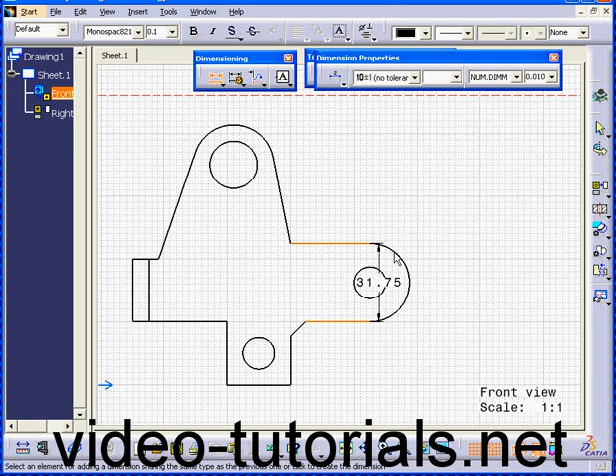I'm going to select the Dimension command from the Dimensioning toolbar. The same command is available under Insert, Dimensioning, Dimensions. I'm going to select one line and a second line. Click mouse button 1 and you have your dimensions.

After we've created our dimension, we can still adjust the position. Let's try this again. Click Dimension. CATIA prompts us in the information corner to select the first element for dimensioning.

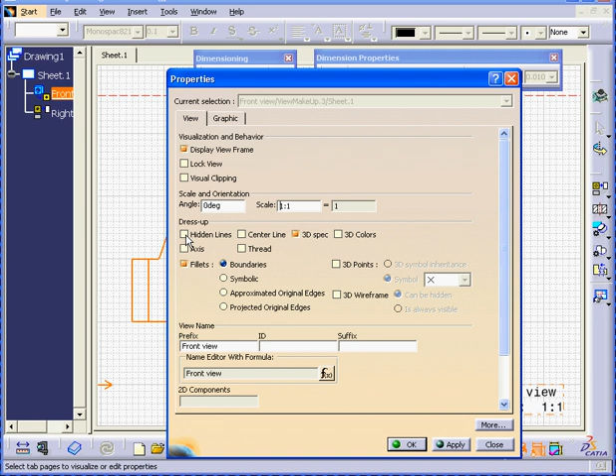I'll select this edge and create another dimension. Let's now right-click on Front View, Properties. Choose Hidden Lines and Center Lines. Click Apply and OK. Now we have center lines and hidden lines, which appear here and here.

This hole is not visible on the front view, but we do see hidden lines right here.

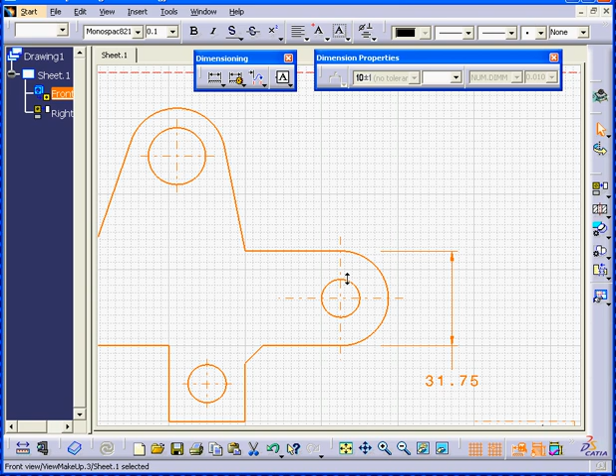Actually, let's create one more dimension. Select this line and this line. CATIA creates an angle dimension.

Let's select dimension again, and we're going to select the edge of this hole. CATIA now creates for us a diameter dimension.

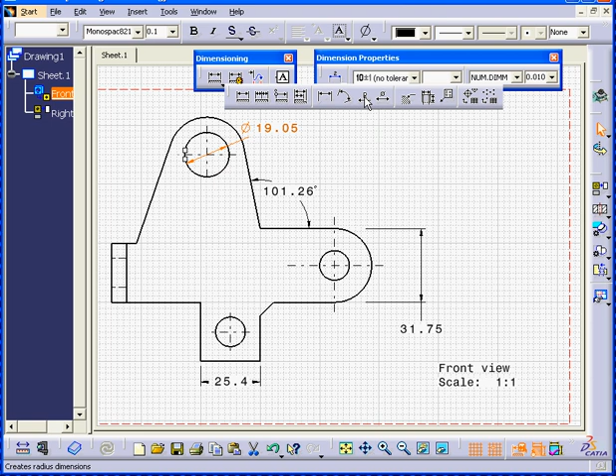If we want to create a radius dimension, we expand this toolbar and choose Radius. Now we have a radius dimension.

Or, go back to Dimensions and click on the edge of this hole. Right-click and choose the dimension you need. In this case, you can choose between diameter or radius.

Now if I click on the center line, handles appear. I can drag those to change the center line length. Let's create a dimension between the center line and the edge.

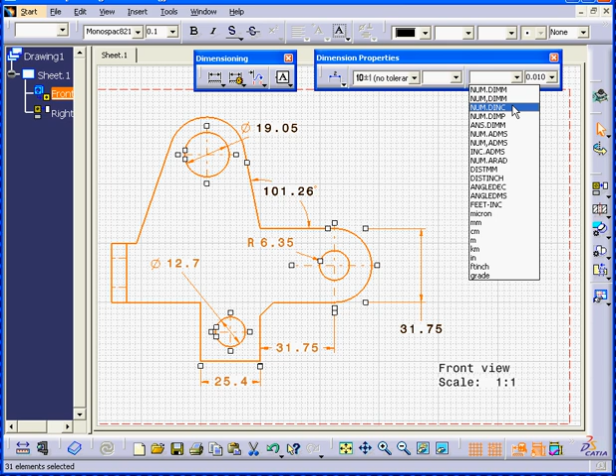We do see dimension values in millimeters. We can change it to inches. Highlight everything, and go to this drop-down menu. Choose Number Dim Inches. Now we see the dimensions in inches.

Lastly, I'd like to show you chamfer dimensions. Select the chamfer dimension and select the chamfer, a second line, and a third line.

Now right here in the Tools palette, we can choose length to length, length to angle, choose one symbol or two symbols. After I'm satisfied with my choice, I click the left mouse button and I will have a chamfer dimension.

To choose the visual appearance of dimension lines, use this drop-down menu. After we select, we can still adjust the dimension lines.

Next, I'd like to dimension this line here. When I mouse over it, though, I see that it's actually two separate lines. That's because the solid was created this way. This is one solid, and this here is another.

There's a way around this. Select Dimensions. What you're going to do is create dimensions between this line and this line. First, I select this dimension, and then this one here. But watch what happens. CATIA creates an angle dimension.

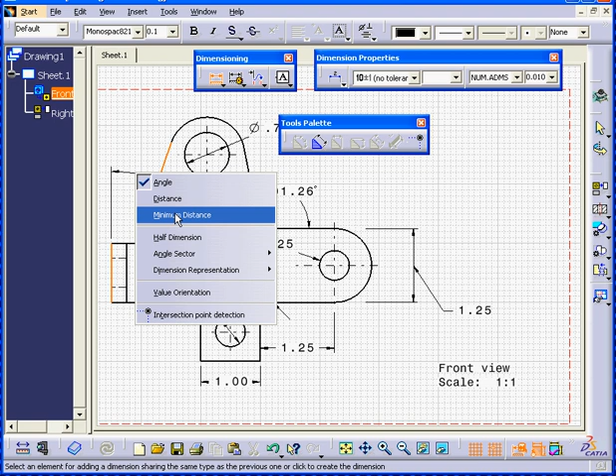So what we do here is right-click, and we have two more choices: distance and minimum distance. If I select distance, CATIA may create a dimension between this line and this tangency. That's not what we want here. So I select minimum distance, and CATIA then gives me the dimension I need.

This concludes our tutorial on basic dimensioning.